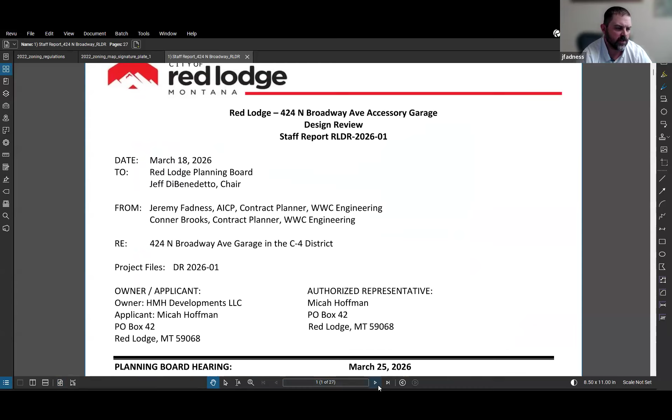Thanks, I'll take that. I'll share my screen so I can share the staff report. Okay, so this matter is for a design review for 424 North Broadway Avenue for a garage addition to the existing structure on the property.

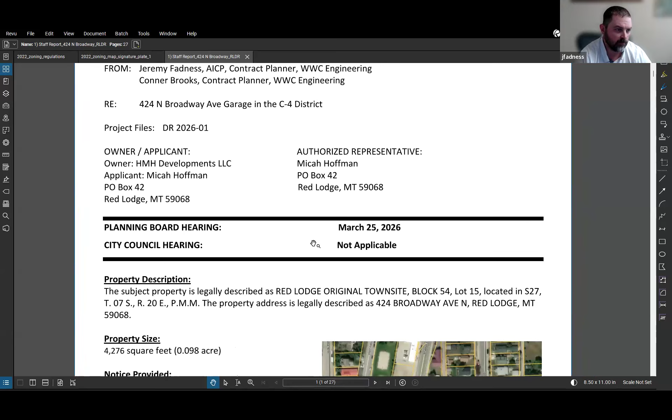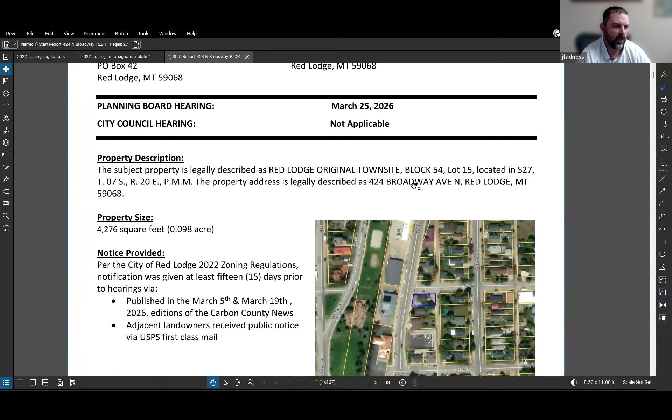Hold on, I need to figure this out, there we go. The owner applicant is HMH Developments LLC, with the authorized representative Micah Hoffman. Tonight is the planning board hearing on this application. The property is described as 424 Broadway Avenue in Red Lodge, lot 15, block 54 of the Red Lodge original town site. You can see the location map, the property outlined in blue at the intersection of Broadway and 6th Street East is the property location. The property size is 4,276 square feet.

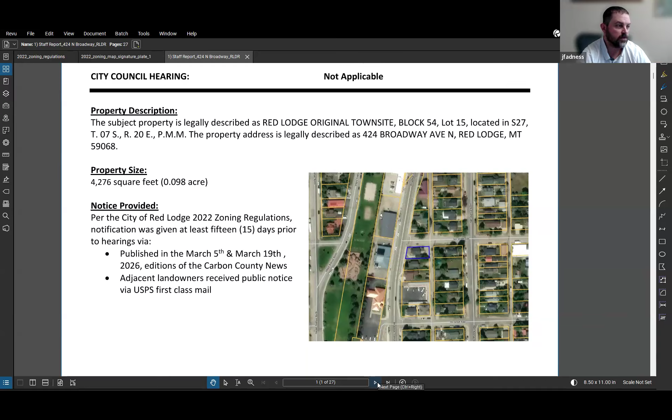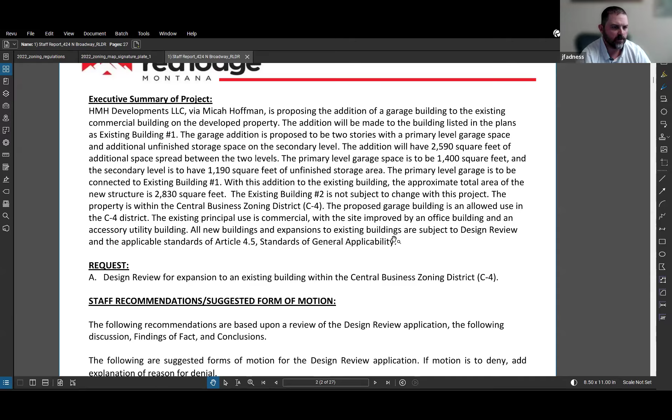The proposal is for the addition of a garage building to an existing building on the developed property. The addition will be made to the existing building number 1, shown on the site plan provided with the staff report and the application. The garage addition is proposed to be 2 stories with a primary level garage space for parking and an additional unfinished storage space on the second level. The addition will have 2,590 square feet added to the existing commercial building on 2 levels. The primary level garage space is 1,400 square feet. The secondary level is 1,190 square feet of unfinished storage area. So the total square footage of the building with the addition will be 2,830 square feet.

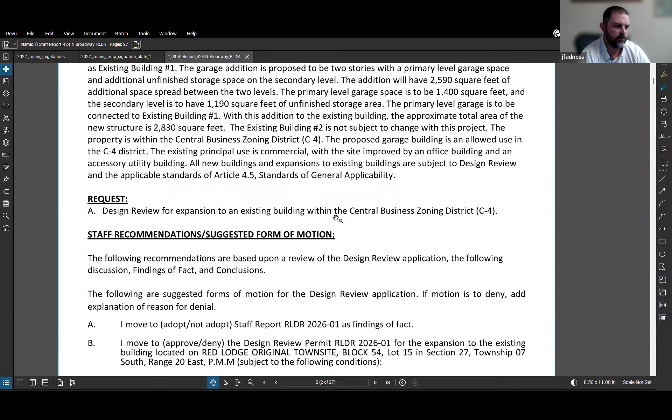The existing building number 2 is not being changed, and there is also an existing accessory storage shed on the property. Design review is required for expansions to an existing building within the central business district. This is not a conditional use permit, this is only design review for the proposed garage addition.

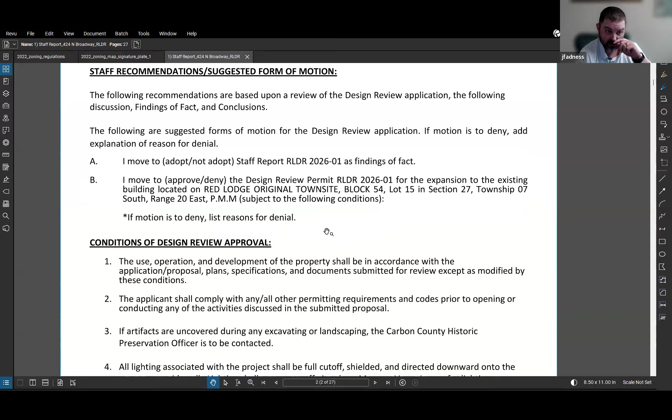You can see there will be 2 motions. First will be to move a motion for the staff report, to adopt the staff report and findings of fact, and then also move to approve or deny the design review permit for the expansion of the existing building.

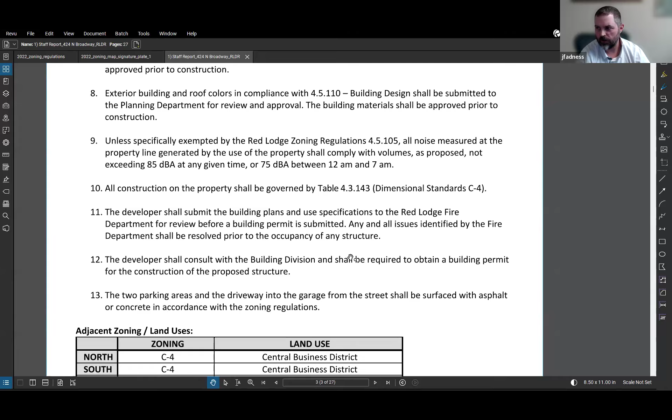We have listed several conditions, 13 conditions with the design review. These are all associated with current required standards of the zoning regulations. We do not have specific conditions except for condition 13, that the 2 parking areas and the driveway into the garage from the street shall be surfaced with asphalt or concrete as required by the zoning regulations. That was not shown on the site plan, so I added that as a condition.

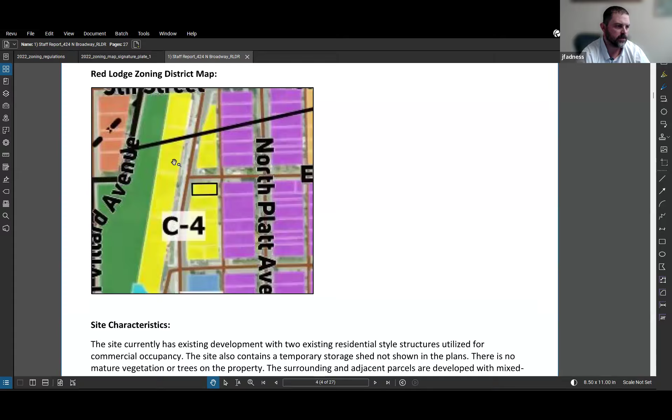Adjacent zoning north, south, and west is C4 Central Business District. East is R3 Medium Density Urban Residential. You can see from the zoning map here, this is the property - C4 Central Business District, and then the R3.

The site is currently developed with 2 existing residential structures utilized for commercial occupancy. The site also contains a temporary storage shed, which is not shown on the plans but is on the property. There is no mature vegetation or trees on the property, though there is some existing trees around the site and some existing landscaping on the front of the property on Broadway.

The surrounding properties are developed with mixed-use commercial and residential buildings. The parcel is not located within the mapped 100-year floodplain. It is within the 500-year flood hazard area, and located 1,450 feet from Rock Creek.

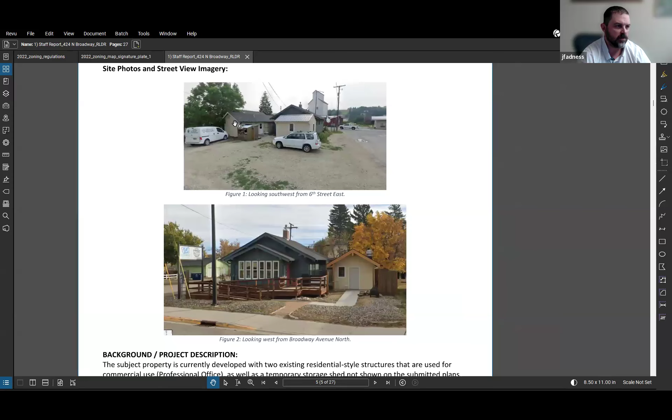So here's some pictures of the property. Here's the rear of the property. Here's existing building number 1, the structure right here - this is the structure that's being added onto with the new garage addition. There is this existing storage shed, and then this structure here that is not part of the addition. Here's a view from the front, so the garage addition will be in the back behind these buildings from Broadway, looking from Broadway.

So we went through the design review process. The design review process does require that we look at the standards of general applicability. One thing I will note is we have not received any public comment written prior to this meeting that I am aware of.

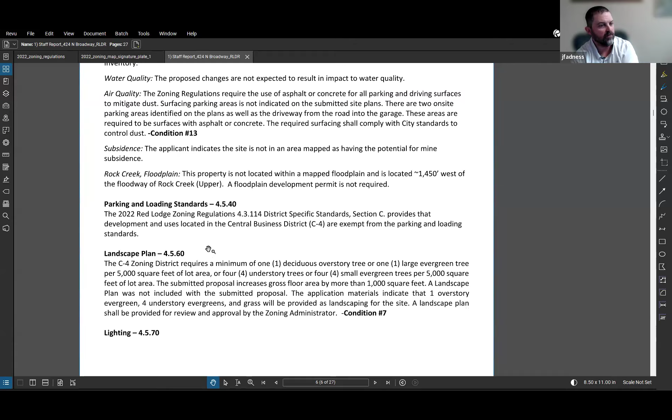So we went through the standards of general applicability, which is required for design review. This is not subject to hillside developments or environmental regulations. There's no wetlands, there will be no water quality impacts associated with the project. Air quality impacts will be minimal - condition number 13 addresses this. No areas of subsidence evident, and it's not located within a floodplain.

Parking and loading standards - C4 is exempt from the parking loading standards. We have a landscaping plan. The application does indicate that they will provide one overstory evergreen, 4 understory evergreens, and grass as landscaping for the site. Condition number 7 requires a landscape plan be provided for review and approval.

Same thing with lighting - they are proposing cutoff lights on the addition, and condition number 4 addresses this. Infrastructure - the site is already served with city water and sewer, and existing water and sewer services will be utilized for the new addition. Any additional utilities will be located underground. Legal and physical access for the new driveway is from 6th Street East to the garage doors.

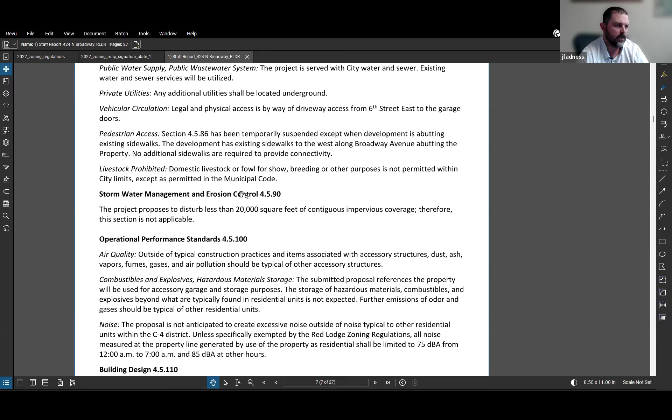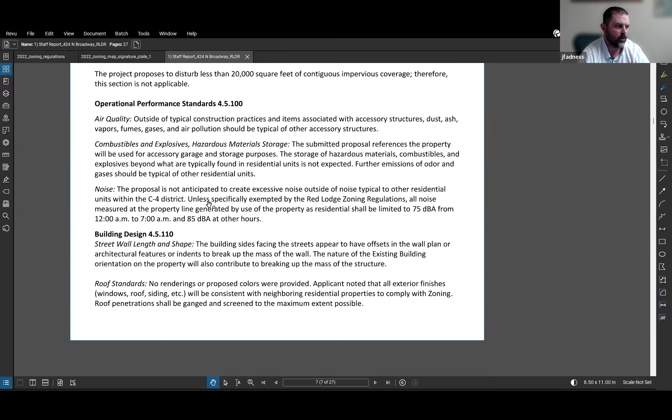They're not proposing any livestock. Stormwater management is not applicable - they are not disturbing more than 20,000 square feet. And we've addressed the operational performance standards, air quality, those sorts of things with our conditions, as well as noise.

So building design, street wall length and shape - building sides facing the streets appear to have offsets in the wall plan, or architectural features or indents to break up the mass of the wall. And the nature of the existing building orientation on the property will also contribute to breaking up the mass of the structure.

The applicant noted, for roof standards, that all exterior finishes, windows, and roof siding will be consistent with neighboring residential properties to comply with zoning, and roof penetrations will be ganged and screened to maximum extent possible.

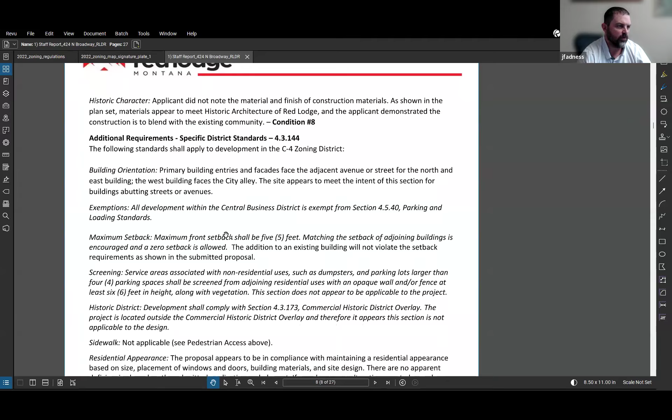The applicant did not note the material and finish of the construction materials shown in the plan set. Materials appear to meet historic architecture of Red Lodge. We have condition number 8 that addresses this. That will be reviewed with the building permit as a condition of this zoning design review.

Additional requirements for C4 building orientation - primary building entries and facades face the adjacent avenue or street. This is met, well, the existing building meets that. This is a driveway entrance that will be off of 6th, so the new structure will be off of the adjacent avenue or street.

Setbacks - there are no setbacks in the C4 except for a maximum front setback of 5 feet. They're not building to the front of the lot, they're building on the back of the lot, so that does not apply. The screening section also does not apply to this review. The project is located outside the commercial historic district overlay, and this section is not applicable.

The project will have a residential appearance, as you saw in the rest of the application with renderings and plans. It's going to essentially look like a garage attached to the existing structure.

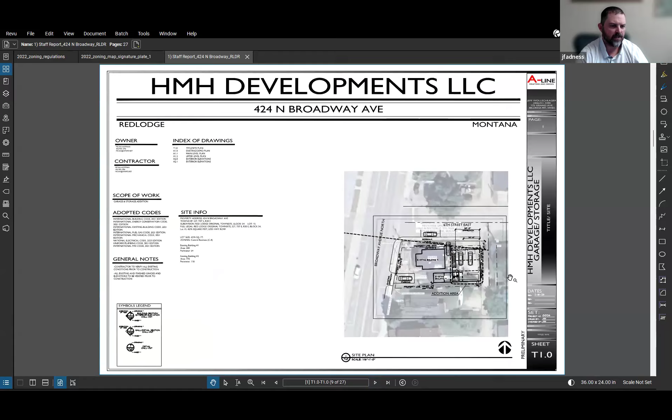So with that, I think I'll turn it over back to you, Sandy. And if there's any other questions, I can certainly show the plans on the screen. And maybe I'll just show the site plan while you're talking.

Thank you, Jeremy. I'm going to qualify the planning board. Does any member of the planning board have any ex parte communication to disclose? Please verbally say it so that we have the recording. No, I do not. No. Thank you. I do not either.

Does any member feel that they should recuse themselves from participation in the hearing and decision on the matter before the planning board? We'll start with you, Susan. No. No. No. Jeff? No.

The authority is the city planning board, vote needed for action, standard of review, Red Lodge zoning regulations. Has the matter been properly noticed as required by the Red Lodge zoning regulations? Yes, it has. Jeremy? Yes, it has. Thank you. Let the record indicate that the Red Lodge City Planning Board has been called and qualified to hear the matter at hand, that the matter is quasi-judicial in nature and has been properly noticed.

Report on the request on behalf of the city. That's probably what Jeremy just did. I think, yeah, we've got the city part done. Okay. And a report on the request on behalf of the applicant.

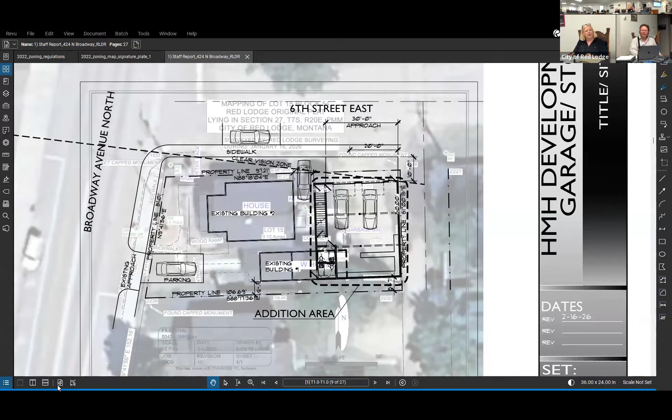So do they have to have a landscape plan? Good question. According to your 4.5.60, well, so it's per 5,000 square feet of lot area. So that doesn't mean that, so the actual section says that any development requires landscaping, a landscaping plan. This just means that this is what you have to provide per 5,000 square feet.

So since their lot is less than 5,000 square feet, it would just be that one. So they'd have to only technically provide one deciduous overstory tree or one large evergreen tree. Does that make sense? Or the other stuff, right? Or four understory trees, or you know what I mean? So right, the submitted proposal so the

requirement is if the submitted proposal increases the gross floor area by more than 1,000 square feet, then a landscaping plan is required. Okay, and that does meet that, so.

Barely. Any other questions? Questions of the applicant? Jeff, are you okay?

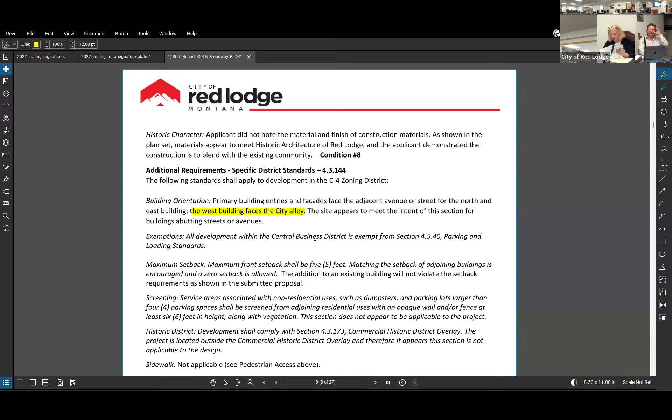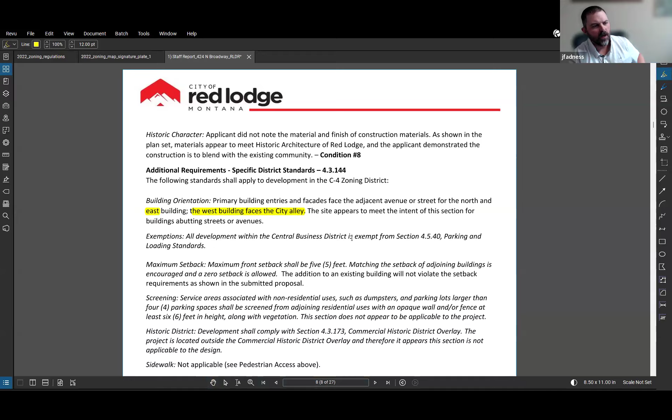Yeah, this should be north and west here too. Okay, I can fix that section. Okay, that's all I had.

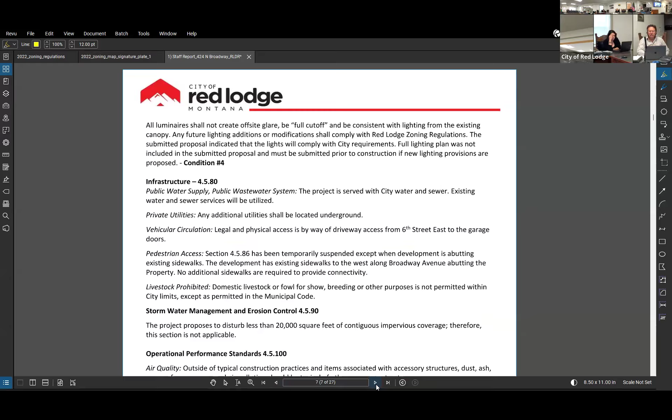Great. I have a question just specifically on parking. So just looking at the site plan, it shows the approach coming off of 6th into the garage space. Did you have something for that? Some insight?

No, I was just marking this thing up and it just made a noise. Go ahead. All right, I love sound effects. This is fine.

So I'm looking at this approach, and then directly next to the garage space, there's another vehicle parked. So wouldn't that approach also continue? Because you can see where the car that's parked on the street, there's not another image of that close to the approach. So I assume that approach is actually extending basically to the corner of existing building number 2. Is that correct? Yeah, that's probably more of a building permit working with Brian thing when they actually go to build this. But I would assume that you would be correct.

Okay, and the surfacing is part of that, condition number 13. Micah, you had a comment? Yeah, I can answer that. I guess he did dial it into 35 by 40, but that car was there whenever I bought that shop, but there was more space.

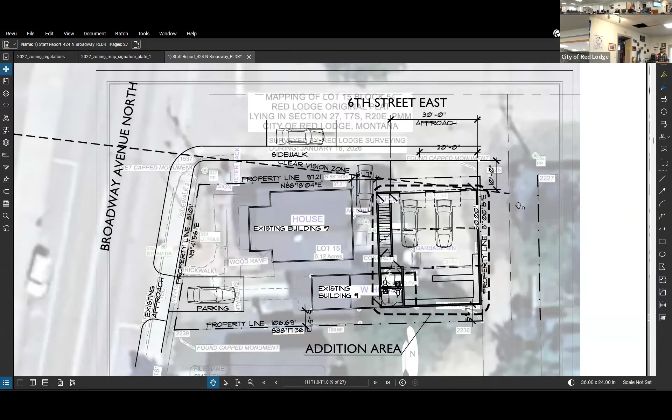Gotcha, there's like 8.5 feet there now, so it's not going to be usable parking. No one's gonna park there, it'll probably be a dumpster for the property. Sure, yeah, I mostly just want to know how it's going to affect the street parking next to it, with employee rigs coming in as well as 2 commercial buildings in the front and their customers. Not that I'm as worried about parking at that section of town, it's not like it's right downtown, but just something for consideration. But yeah, that's all I had a concern about.

Okay. Anyone else? Are you okay? I'm good. You look like you're in thought here. No, I think Micah did mention in his portion that the lot boundaries were smaller, and so they reduced the scope. So yeah, I'm good with it.

Well, at that point, I'll entertain a motion, as I'm looking at you. I was gonna say, looking at me, okay. I am. Hold on, let me get back up to the motion.

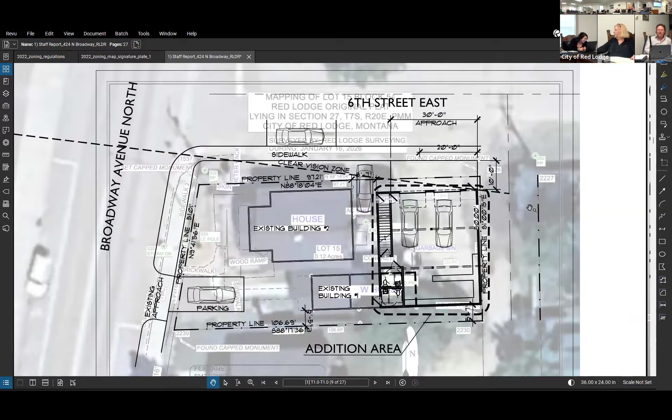I will move to approve the design review permit RLDR 2026-1 for the expansion to the existing building located on Red Lodge Original Town Site, Block 54, Lot 15, in Section 27, Township 7 South, Range 20 East, PMM, subject to the following 13 conditions. Didn't do the math. Thank you, John, for seconding.

I was told there'd be no math.

And no discussion? Could we have roll call? Roberts, yes. Gray, yes. Tupin, yes. Boise, yes. Conley, yeah. And Di Benedetto, yes.

Well, that was probably the easiest design review we've ever done. It was very thorough. Yeah, it really helps. Thank you for your thoroughness, Micah. Got it. Thank you, guys.

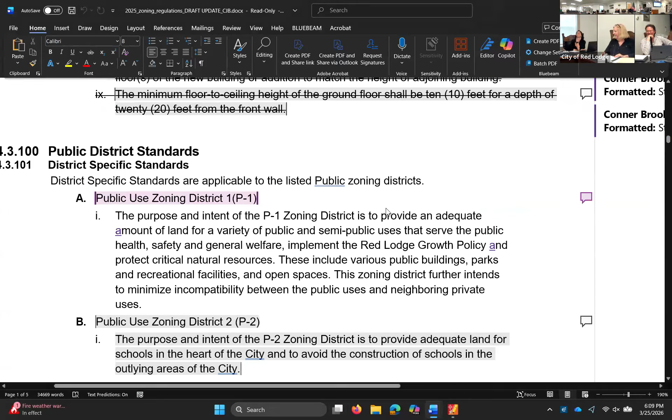Let's see, where did we leave off? I think it's somewhere in this. Are you gonna pull those up, Conner? Yeah, I think I wrote that we were starting at 4.3.110, but I think we decided to look at 4.3.101, public district standards. We were struggling with that, so we were trying to pass over that one, but we didn't quite make it. That's right. Well, it's all right.

We're missing our Jeremy. So based on Conner's notes from the last meeting—I apologize, I wasn't able to attend the last meeting, I was snuggling my new grandbaby—I looked into some other zoning regulations, in Helena, Billings, and Missoula, on their public districts.

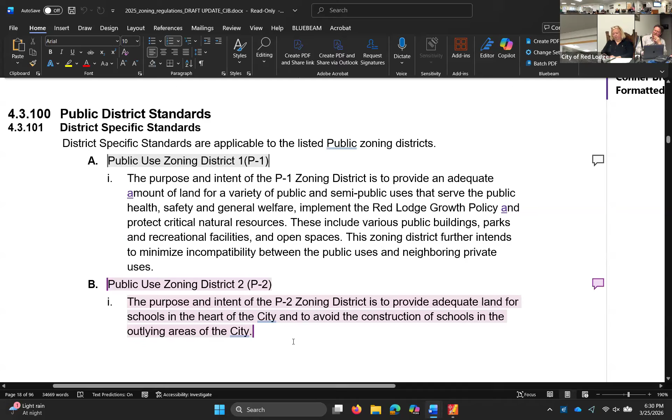It makes no difference to me. Yeah, that's fine. I think that makes sense with the way this is written right now. You have the discussion up above about P1, a variety of public and semi-public uses, public health and safety. That generally fits with other definitions I saw where they're allowing those public buildings, schools, that sort of thing.

And then I think, so let's do that. P1 will be that public buildings, recreational facilities, etc. So in the second sentence there, Conner, take out parks and take out open space, essentially. And we can tweak this a little bit more with the language, but this will be a start at least. You'll want to keep recreational facilities. Yeah, leave recreational facilities and just put in open space, et cetera, something like that.

And then under P2, that's going to be provide adequate land for open space. I would just, we'll play with the language a little bit more. I'd take the rest of that sentence out. And I might add a little bit more language to this just to make it a little more clear. When you go back through it, you can review some of that additional language, if that works.

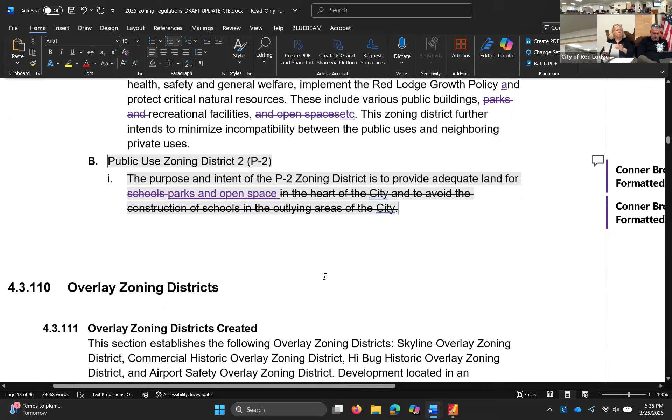And we're up to 4.3.110, overlay zoning district.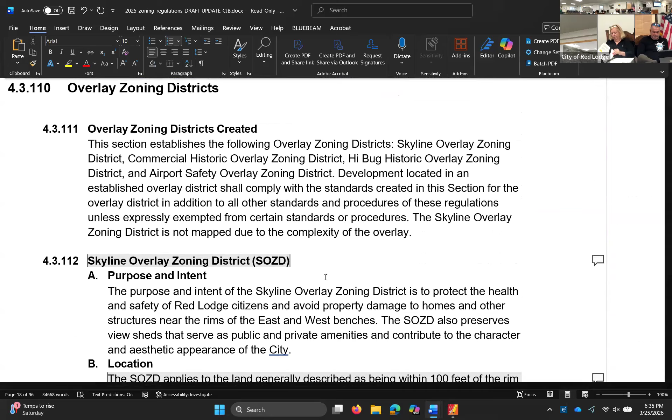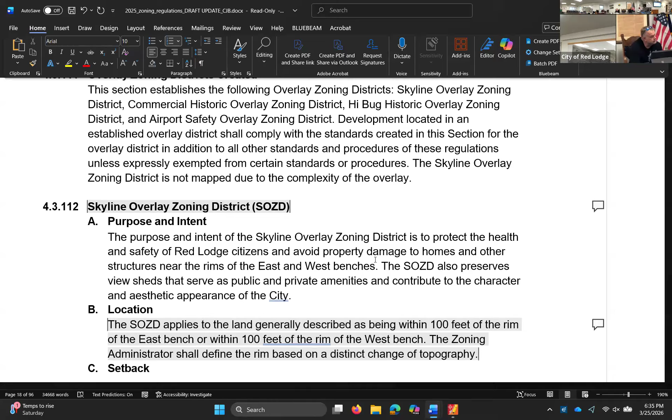Okay, so as we get into this, I have a few comments. I went into this a little bit. So I'll start on the Skyline Overlay Zoning District. I did not see this on any map, so I don't see where this is designated anywhere. So I don't know how we apply this if it's not on the map. So I think two things: either we need to put it on the map so that when I or Brian or whoever in the future is reviewing for zoning, we know what this applies to, because right now I don't think we know. So that's the first thing.

If you don't want to put it on the map, then I would say we just have to take this out because we have no way of enforcing this, since it's not on the map. And it hasn't been enforced, especially up on the golf course in those cul-de-sacs where they build and there's skylining where you can see the houses from below, even with the setback requirement. But the point was that you didn't want to see them at all, houses all lined up along the back.

That was going to be my next question: has this even been enforced? My golf course question was because if you haven't been enforcing it, probably because it's not on the map, then I don't know how you move forward with enforcing it now. I think you're going to get pushback from people if you start trying to enforce it now.

This has been being enforced. I'm wondering if there's a possibility that this has been somehow lost in the transition from the old draft to the new draft, or if it's just something we need to put on the zones. What I'm recalling are the pictures with the slope and the angles, and I know that gets used, but it may have been implemented via text only. If you're against the hill, then you have to—in my mind I remember the old text-only version of it.

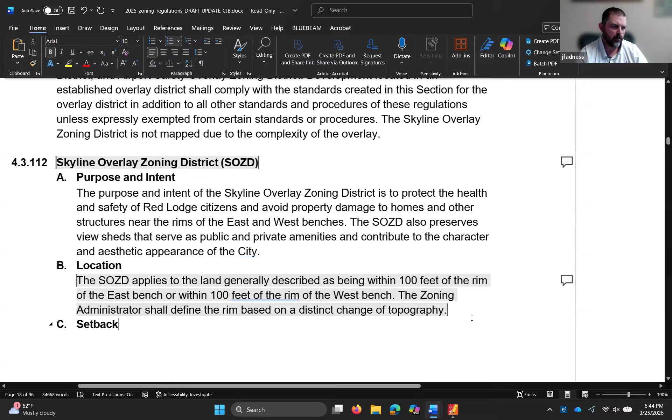We'll make a note to add that to the zoning map, for review, as we get onto the zoning map later. We'll make a note of that.

The rest of the Skyline zoning district, I guess I didn't really have any comments on the rest of the district. That was the only thing I had commented on that overlay district.

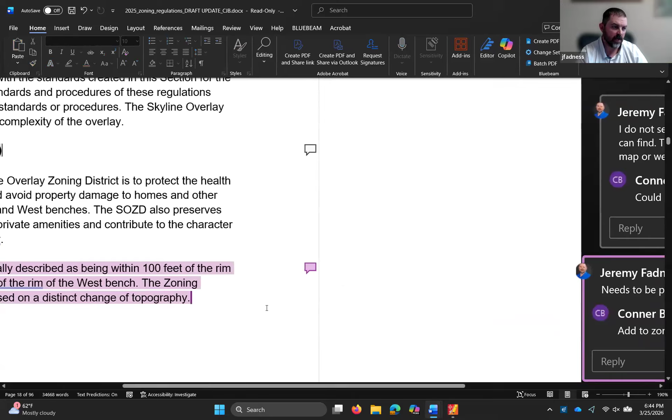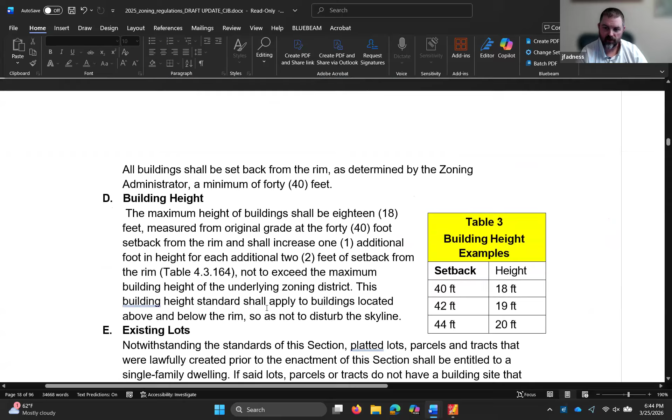Conner, go ahead and go to the next page and we can just briefly go through the rest of this section and see if anybody, it sounds like we've been doing these now, so it doesn't seem like we probably need to make any changes to this overlay district, but since we're here, we should probably just make sure that nobody wants to make any changes to this.

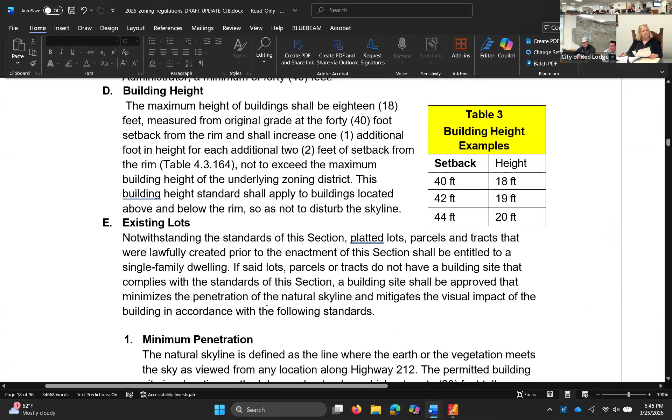I was just noticing that B up above is actually, it's not a graphic depiction, but it defined it textually, which is how it's been getting enforced, I'm sure. The one thing that's there is it says shall define the rim based on a distinct change. That's the one part of that maybe there's some vagueness in.

Well, and it also leaves it up to the zoning administrator, which I don't particularly like, because again, that leaves it up for interpretation, right? My recommendation is always take the interpretation out as much as you possibly can and make things clear, because zoning administrators come and go.

So I think that just getting it defined on the map clears this up so that it's not vague, and basically we change this language here to say it, showing on the zoning map as Skyline Overlay Zoning District or something. But the problem is, you still have to have 100 feet from what point?

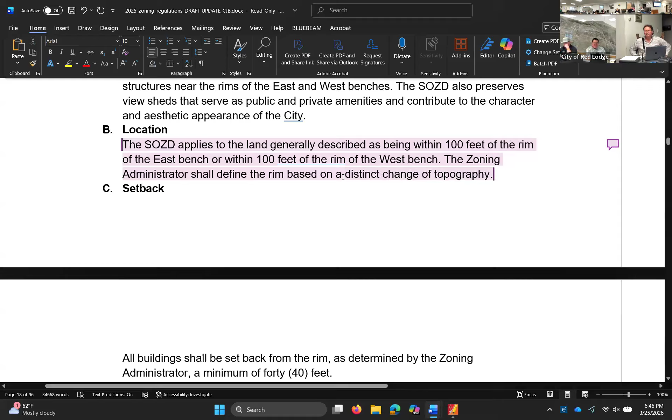So do you draw the actual rim in on there from the GIS information like Jeff was saying? Yeah, we'll use this description to draw that in. So we'll basically draw the rim in there and then offset that 100 feet, and that's essentially our district boundary.

I apologize if I was multitasking, kind of mixed it up. You guys already ended up there. I just...

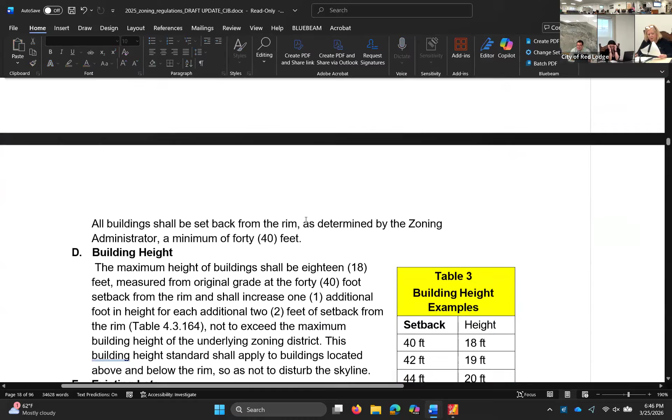Okay, perfect. So do we have any other questions on the Skyline Overlay Zoning District? We can go on to Commercial Historic. That's what we were thinking of, is these diagrams.

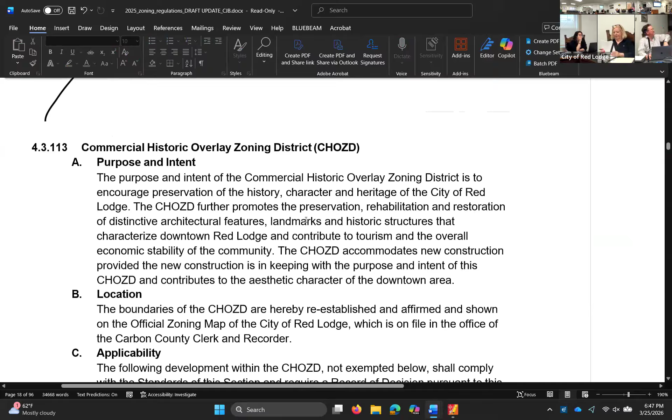I went through the Commercial Historic Overlay Zoning District. I think this has all been hashed and rehashed through the growth policy updates. Unless there's anything you guys want to update, this is very specific to Red Lodge and your overlay district, so I didn't see anything that needed updating from a process standpoint. I think this is just more preference in what you want in that district. So I'll leave it to you guys to see if there's any changes you want to make.

Jeff, do you have a concern? No, I don't have any concern. I don't have any changes.

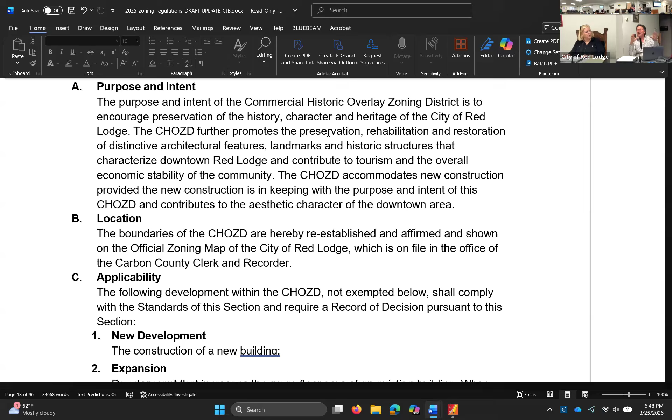Okay, good. Perry? I just have one comment. There's a newer building - I like the building, don't get me wrong - but I don't see how the Babcock and Miles Wine Bar fits in with the historic character of the downtown. I think that's where we get into trouble with subjectivity, and it's up to the interpretation of the planner. I think when we use things like historic character, we need to define what that really is, and then adhere to it. Don't get me wrong, I like the building, I think it's a great addition to downtown, but I think we run the risk of being inconsistent.

And that applies to any new construction downtown. I can point to other areas around town where we've kind of bent the rules and done things that really weren't the intent of, as I read it. There's very specific standards in this section about exterior materials, architectural features, bulkheads and kick plates, ground floor window requirements, upper floor window requirements, parapets, cornices, paint colors, and prohibited lights. So there's pretty specific standards in here.

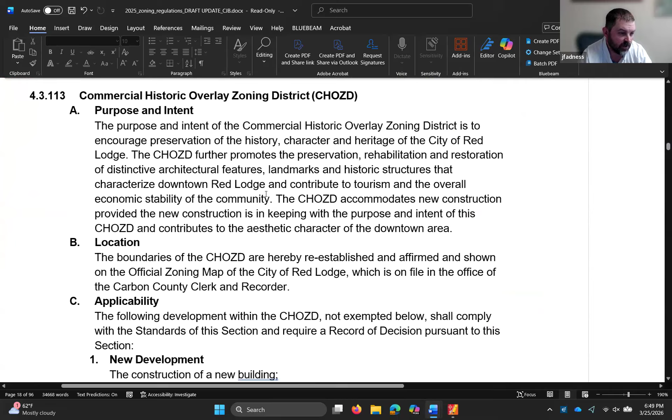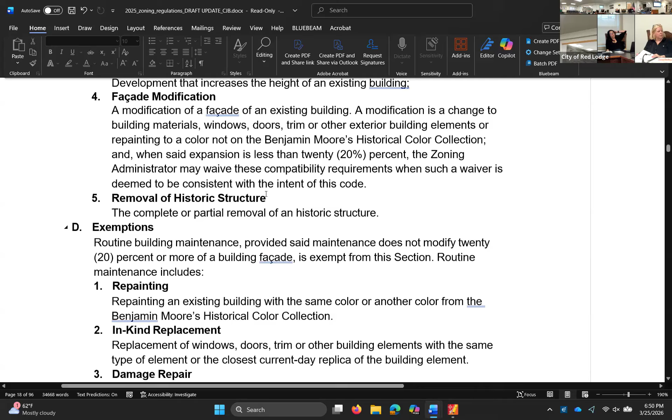So the question for Perry would be, specifically, what of the Babcock and Miles architecture looks modern to you? So it looks like a new building. Well, no, it doesn't look like a new building, it has a modern, contemporary look - it looks like a contemporary modern building. And don't get me wrong, I know the architect and I know the owners. Right, but I'm specifically asking for a visual example besides 'it looks X.'

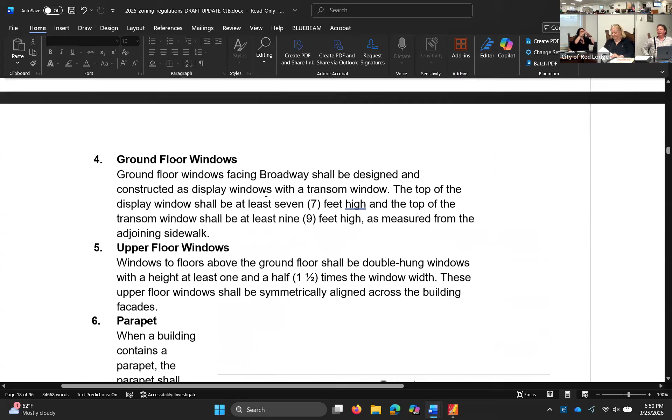So again, I think it's subjective. It has to do, I guess, to me, with roof pitch. Okay, so that might be it - I'm trying to address the thing that needs to change.

Or even, if you go down Broadway, you have all these false fronts - literally, originally they were all false fronts, and truthfully a lot of the backs never went beyond that. There's another apartment complex over there too, or that's a living structure of some sort, down by - it's the old Carbon County News building. Do you remember what it was like before, with cinder block? But what I'm saying is those squares - I think that looks good, it doesn't stick out like a sore thumb. It doesn't have the same roof line, it has basically a flat roof line, but that's in character with most of the downtown.

That has string lights - oh, sorry. I was thinking it was probably about the same thing as Babcock and Miles. No, that has an extreme - I'm not even sure, off the top of my head, what our height restriction downtown is, and maybe that's something we need to consider, because there are buildings downtown that are more than 30 feet.

Right, so I just want to identify what the contemporary aesthetic is that needs to be eliminated, and also how do we define that historic character? So again, what genre are we going for? Because that roof line and that pitch is actually very historic for a different timeline or a different period of history.

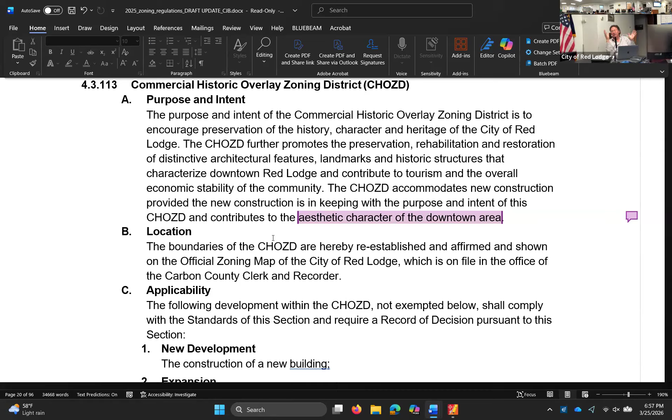Jeremy, it's Perry again. I like Sandy's idea of maybe bringing this area back to Broadway, facing Broadway, and maybe to the alley, where appearance needs to be similar to adjacent buildings. I'm only saying that because we have vacant spaces, and we don't want, I don't mind Babcock and Miles, I like that building, but is that a building we want to see on Broadway?

Right, not on Broadway. Look at the empty places that are on Broadway and what it was before it was built, it was a house, a modular. That was the dentist office.

I mean, we could certainly amend the zoning map to take some of those lots out that are outside of the Broadway corridor, if that's what you want. I still don't think that fixes our standards question.

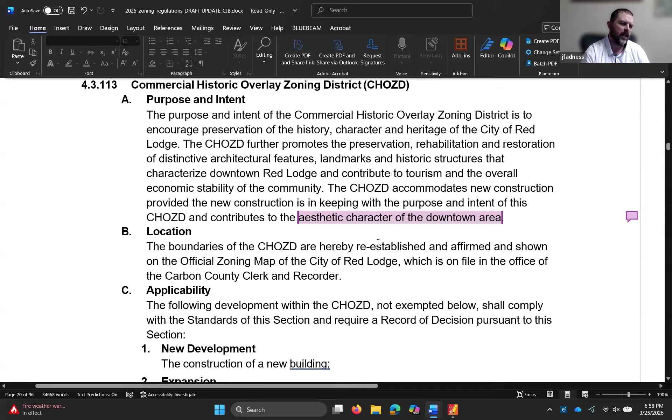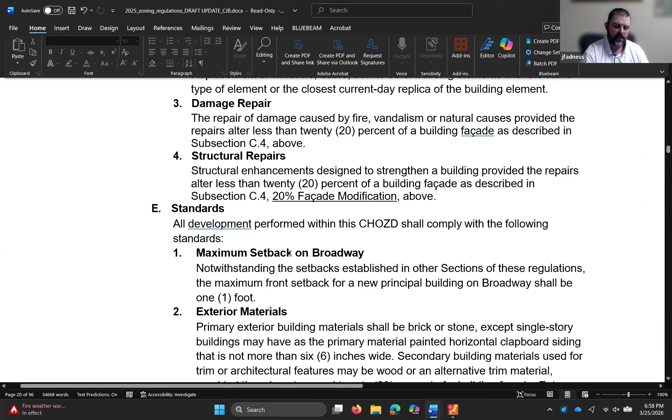But I mean, it definitely fixes the... what does this apply to? Let me do this, let me review the standards. Connor, just highlight the standards section of this. Let me review the standards against the recommendations of the '86 plan, and let me see if I could come up with some recommendations for revisions.

Okay, that sounds good. I think we're going to have this similar issue, and maybe there should be a reference to the 1986 plan within this area. Jeff said, though, they're just recommendations in there, there's no standards per se, so we have to translate that into an actual standard or regulation that we can enforce.

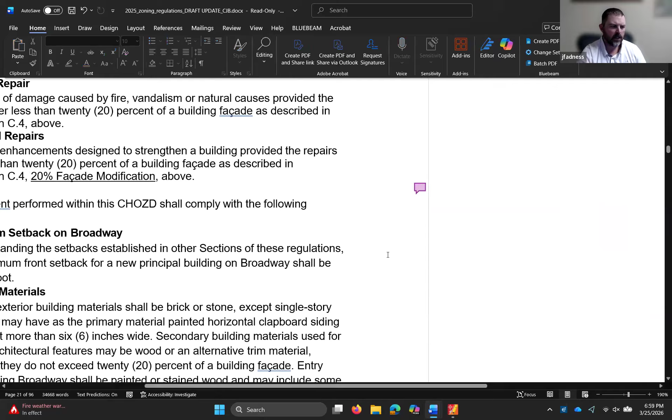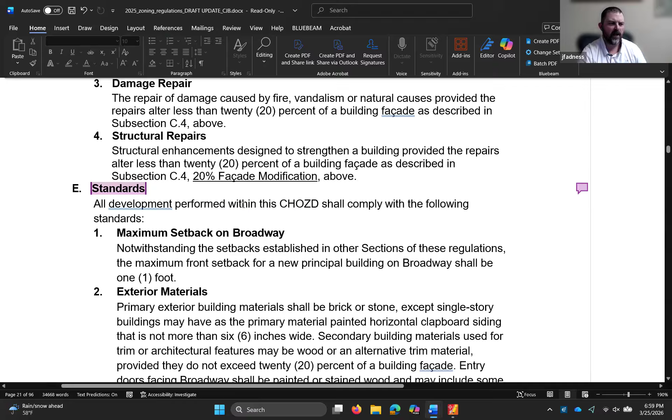So we could certainly reference the '86 plan in the purpose and intent section, or even under the standards section say these standards are derived from the recommendations of the '86 revitalization plan or something to that effect. Then try to get these standards to mimic or at least work towards implementing the recommendations of the plan, right? Because that's the goal—you want the regulations to help you implement the plan. So I'll go through that '86 plan against the standards and see if I can come up with some recommendations we can make to this section that would help us do that.

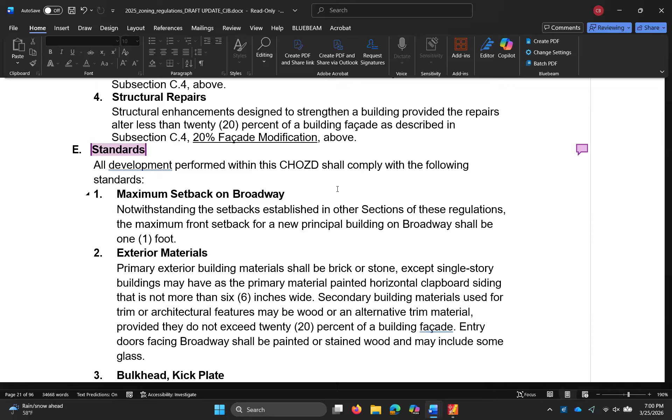I have one more comment. There's been three new buildings built on Broadway that really mimic, I think, or capture the intent of what's desired—the Rocky Fork, or the new dental building, I think that's Rocky Fork. And then there's Rock Creek, Black Canyon Bistro now, it used to be the Bridge Creek building. Even though that's set back a little bit, it still captures kind of the design and intent of the downtown. And then what used to be the Twice Touched antique store, that's now built as well.

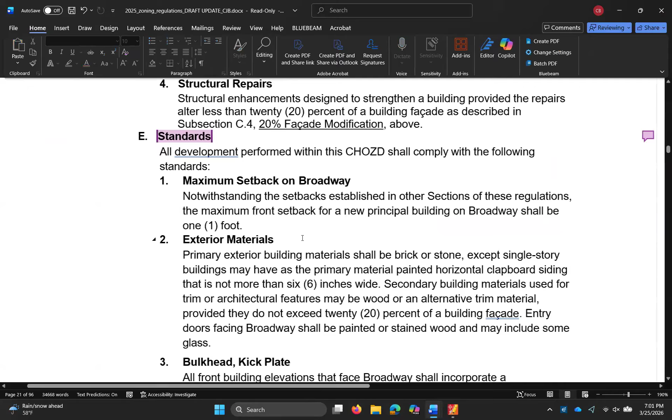So, I guess my whole point is, even though it sounds like it's ambiguous, we've been pretty successful with the existing language to encourage developers to try to build or match what that downtown historic look is, or what we're striving for. Our past planners have been successful in working with developers that have built those buildings to try to match what we'd like to see as far as historic downtown building design.

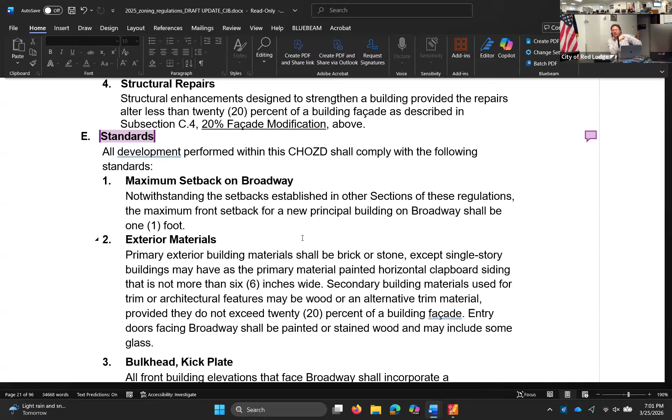Well, I think those are all excellent fit with downtown, and the challenge there from a developer or builder perspective is they went to a great additional cost to bring those facades to that appearance level, and not everyone's going to be willing to do that, especially with costs as high as they are today. Prerogative was another one that they redid the front, and it's kind of different, actually.

But there are a couple other buildings in this overlay that will probably be demolished and rebuilt, so we do need to be really specific about what we want to see now before they go down.

Yeah, and this is a little off, but it might give us an idea of some alternatives to what you're talking about. Does anybody know what the new county building is supposed to look like? Mr. Mayor, would you like to address that? They had some very rough drafts that they built out. It's been a year or so since they first presented those, and it looked to me like high schools, where I grew up, sort of a thing.

The county would be the appropriate people to look at, because when they drew it, it was not the full plan, it was just the PAR level drawings. And it looked like a municipal building, or a school, I guess that would be kind of the same thing.

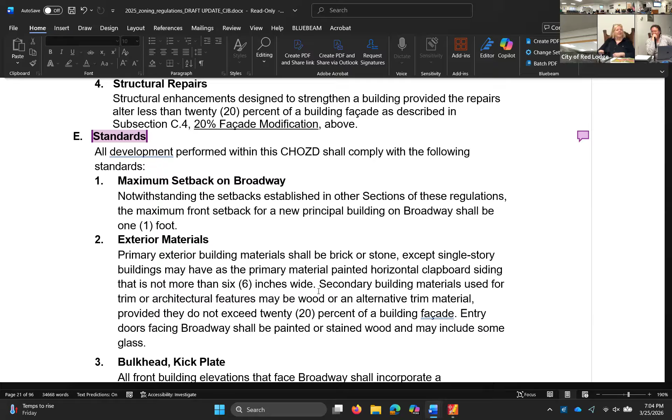Counties and federal agencies don't have to comply; it's encouraged but not required. I think we've beaten that topic enough. I'll go through the standards against the 86 plan and look at some recommendations to see if there's anything we could suggest to help further implement the plan going forward.

The next one is the Hi Bug Historic Overlay Zoning District, and there's only one section here, restricted uses - medical office in the Hi Bug. Sorry, it's just such a silly restriction to me. I had a couple of comments on this. First, the underlying zoning in that district is R2 and R3. Medical uses aren't even allowed in R2, R3, so I don't think this should apply. My question is really related to professional offices, which are allowed as a conditional use permit in R2, R3. So what is the reasoning behind this one restriction in Hi Bug?

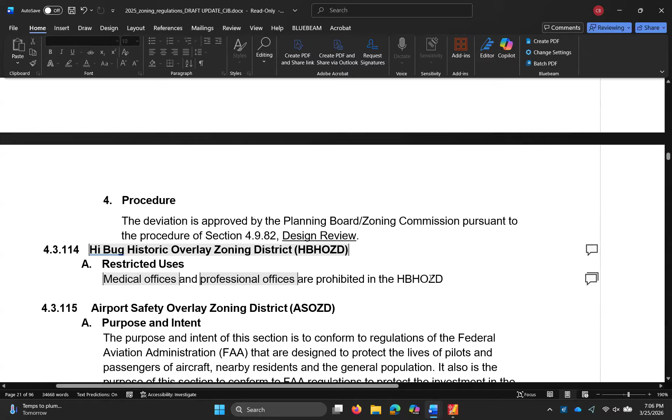This has a long history, I think. It basically came from the residents of that neighborhood who had concerns about changing the character of the neighborhood, and that's what precipitated the development of this overlay district. It goes all the way back to probably the 1994 master plan, and then the subsequent zoning put in place following that in the late 1990s. They specifically did not want medical offices and professional offices, and that's all it was about.

Yeah, doctors are terrible, we hate them. Sorry, it's just such a silly line. But they wanted to turn it into an HOA. It was traffic and parking.

I had a question specifically about the Sunrise House. Did that particular property have anything to do with the zoning, where they were afraid that building could have become medical offices or a professional building? Because that structure would be suitable for that. There used to be trees growing out of the front porch.

So I wonder, thinking back, if this was done for a very explicit, specific reason - does it still need to exist?

Jeremy, I have a different angle. Jeff, is that a designated historic neighborhood, or are there just historic homes in that neighborhood? Just historic homes - there's a historic neighborhood that has definite restrictions. There's a number of historic houses in that neighborhood dating back to the late 1880s. Historically, it was where the most affluent residents of early Red Lodge built their homes and lived - the bankers and the mine operators and owners.

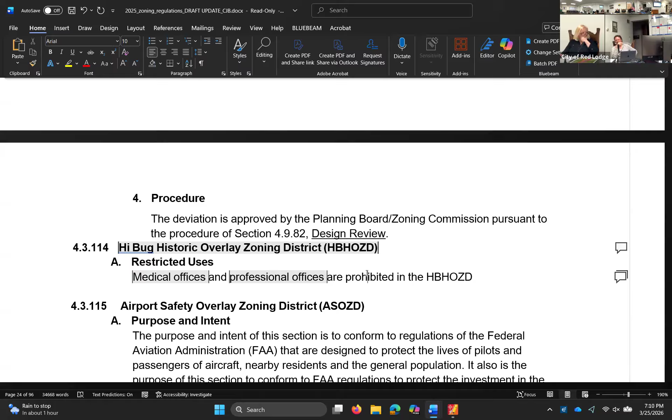I know people that live up in that area. I think there's long been a belief among residents there that it should be preserved as a historic district, and this doesn't address that.

As it reads right now, and we kind of talked about this when discussing R2 earlier, there's nothing keeping somebody from doing a scrape and a rebuild of a modern chrome and glass contemporary home. And how well would that go?

On the whole, the one thing that's nice is the majority of homes within that neighborhood are registered historic homes, and I think that does the preservation. I don't think this does anything to support what they need or want within that district. If we wanted to create restrictions on what kind of materials are used, I don't even feel comfortable doing that, because the historic homes already have those restrictions when they opted into being a registered historic home. For the folks that haven't opted in, it's likely because they don't want to.

I could probably register my house, and you bet your ass I'm not going to. My understanding is that registering it actually doesn't impose any building regulations. Exactly, I know when Regis did theirs, it does not actually impose any restrictions. There's a different level that would put those restrictions on, but that's a higher level.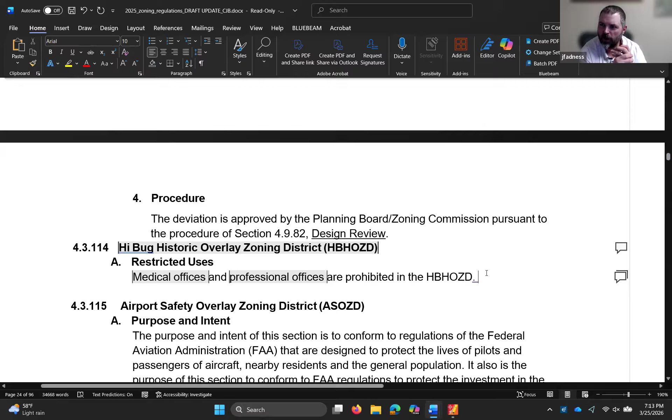The simplest answer might be to add some language in here, a standard section that would say any development must be compatible with adjacent structures, or something like that. And then add a design review requirement that says any structures constructed within this overlay district must go through design review. That way it gives the planning board the ability to review a residential structure proposed in that district for design.

I think if you look at the neighbors, I like what you're saying Jeremy, and there's people shaking their heads yes and no. Hard no, but I don't think that way. We have to ask ourselves, if you've traveled, go to Denver and some of the old neighborhoods. Go look at Harlow.

When property values get to a certain point, somebody comes in and says I want to just buy that for the lot, I'm gonna go in with a bulldozer, take down the historic structure there, scrape and build. And you go to Breckenridge, Aspen, Jackson Hole, Red Lodge, Park City.

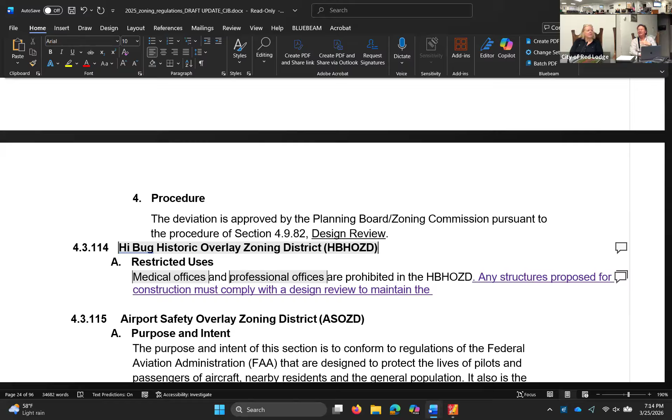Look at 24 on Broadway. What happens when that gets, what do we put there? The challenge is you have the creek on one side. And when you're paying the price of an empty lot across the street on the creek, that house came down. You don't want to build a stick-built 1,500 or 2,000 square foot home there.

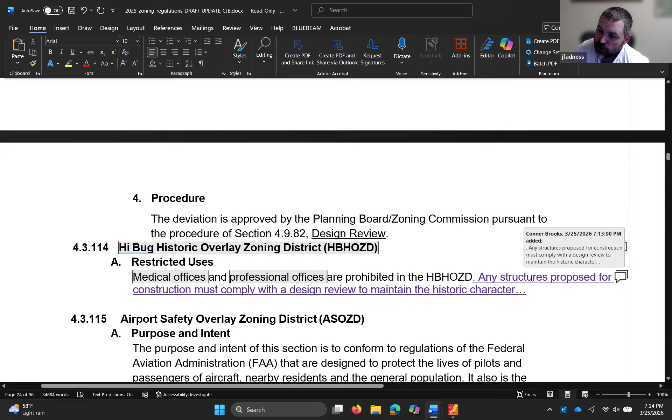So I guess I'd open it up to the planning board then. If there's people shaking their heads yes and some shaking their heads no, maybe we need to hash this out a little bit, get a sense of whether or not the planning board as a whole even wants to make any changes to this section. Jeff, you want to chime in?

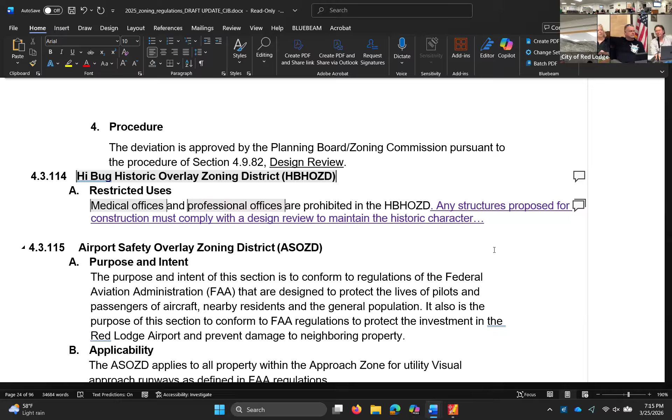Yeah, I think it's worth having something in there to address the historic character and retaining the character of that neighborhood and the types of homes that are there, especially the historic ones. I also think the residents are going to have a say in this if we were to take it out. In past zoning reviews, they have commented on some changes they didn't agree with, not in recent years, but in earlier years.

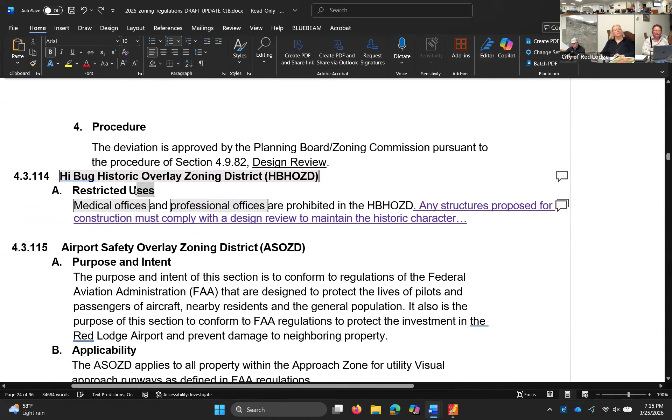Yeah, I kind of agree with the wording that Jeremy started out with. I can expand upon it, but generally speaking, that's the direction I'm thinking. Chelsea has a recommendation.

Is there a way we can get with the Historic Preservation Office to create some standards or a recommendation for historic neighborhoods? Maybe create a district. Well, that's what the district is. Do we create a historical district itself?

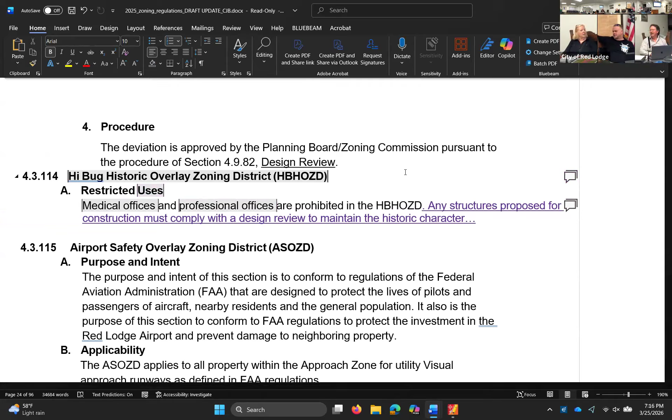That's a whole other bag of worms, but how else do you do it? I know there's a substantial amount of people who have opted in. If you try to say you want it to adhere to the houses next to you, that's not a fair challenge for any planner or building inspector to enforce. That said, if you had some regulation for the homes on the historic register, people who have opted in, some are beautiful Victorians, but there are also a few in between that are not - they're the old garage spaces of those beautiful Victorians, and I don't think they need to adhere to the same protocol.

But if they tore them down - that's what we're talking about. If they tore them down, how do you feel, Susan, about something saying it needs to conform to the neighborhood? Yay or nay? Nay, shouldn't have to. It would be polite, could be nice, but I don't think we should have to. Perry, have to conform to the neighborhood or not?

I say yay, and I'll briefly explain why. If I own one of those historic homes that I put a lot of money into restoring, and the house next door sold and they came in and scraped it and built something - even if it might be an improvement over what was there, don't get me wrong - the first thing people think is that it impacts my property value, because that's not how they're going to see something that's out of character with the rest of the block.

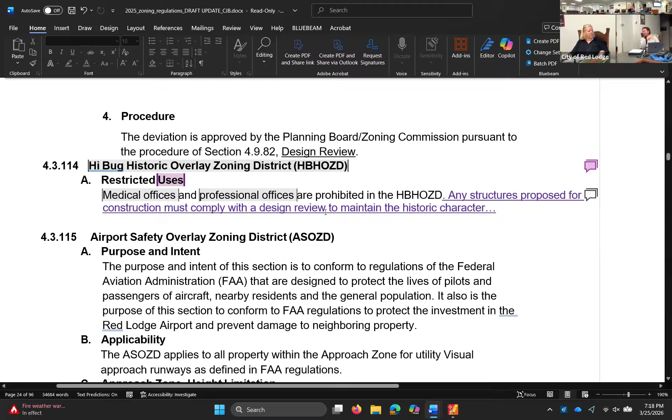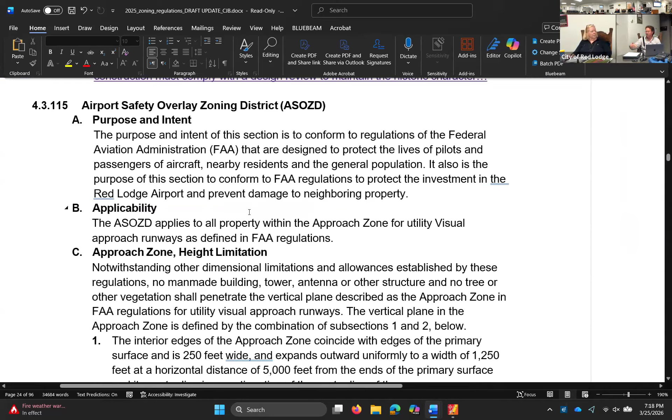And we have areas - the golf course shouldn't look like the downtown or the Hi Bug. Those are different people, a completely different customer. Some of you are realtors, but there are people who would never move downtown because the houses are smaller than they're used to, and the lot sizes are smaller than they're used to.

But there are other people who would say, oh, I'll just buy this house and this house and build my dream house here because I have the money and it's a nice neighborhood, close to downtown. And they're bigger lots. So I don't know, John, I'm just a preservationist - yay or nay on historic conforming?

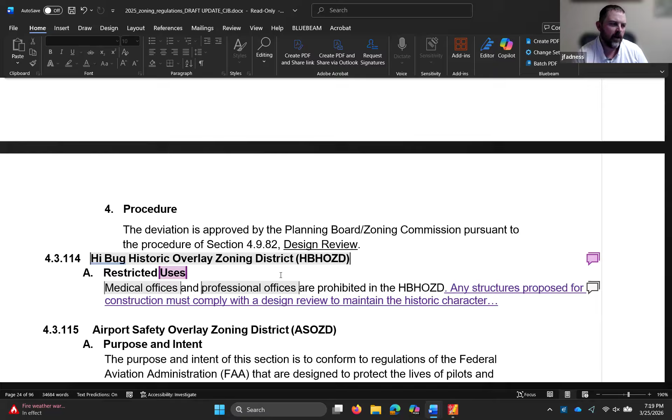Because we're running out of time, why don't we do this: let me look at this overlay district, and let me look at some other cities that have historic districts. I know Helena has one, and there are others around the state. Let me look and see what they're doing as far as language for this type of thing, and we can come back to this with some ideas.

How's that sound? Question on that though, Jeremy - since people do opt in, would it behoove us to look at which ones are in the district and how many really aren't, to do a survey? Because that's the other piece - you could protect them some more if they're... because I can think of like...

There's two blocks where it really makes sense, like the overlay that currently is there, so maybe it doesn't necessarily shrink. But again, if you're gonna be saying this is an HOA, then you gotta get the people involved and they gotta go to a vote. If they wanna come in and have that opinion, I have a feeling you're gonna get a mixed review. You're gonna have five that are really loud about it, and you're gonna have ten that are really pissed about it or don't even show up, and then get mad later when they find out it happened. So I don't think it's necessarily the position of the planning board to do that.

Okay, so we'll stop there and you can give us some ideas of what other people are doing with the historic overlay. It's a great idea. Let me look and see what I can find for some language that's in other jurisdictions, and see if I can come up with language that is strong but not too strong. That's just a suggestion, we'll see how it plays out.